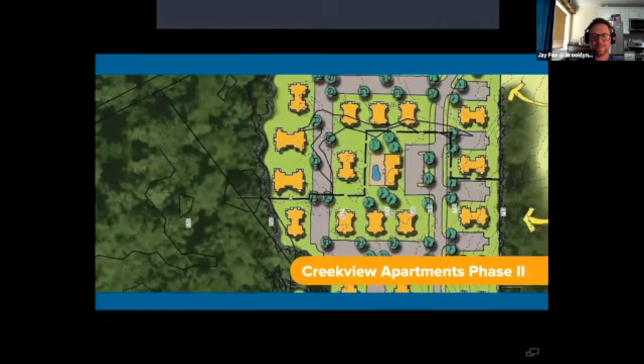This is a 96-unit apartment community, family project with 1, 2, and 3 bedroom apartments. One of the benefits is to get off the use of fossil fuels, taking the first step toward building electrification that will really be able to work off the technologies of the future. Sendero Verde is a 3-building, 800,000 square foot, 100% affordable housing project in East Harlem. It has a really robust community facility. Linden 2 is out in Lindenwood, Brooklyn. It is an 8-story, 160-unit multifamily building, 100% affordable housing.

The challenges are very typical of any other type of project, but if you have the right team, you're able to overcome them. In designing a green building, sometimes the upfront cost is more. Contractors present items that are cost effective, but we had to make a decision to push back and stay true to our design. One of the challenges going into this is we're going to have to find contractors who are willing to be trained to build this kind of construction. I think it's great to see us finally embracing new technology for the better.

I hope that builders, developers actually start thinking diversity and inclusion, and that's all part of our responsibility in this industry. What I really hope is that we can move high performance building from something that's only achievable for a very small percentage of people and really make it part of the mainstream.

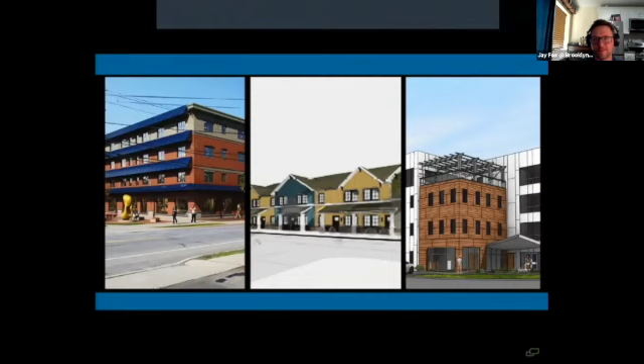We have a statewide climate initiative that's trying to really solve a big problem that the world is facing. The Buildings of Excellence Award is great because it's incentivizing other architects to really push the envelope forward. I'm really excited to see what happens in the next 30 years.

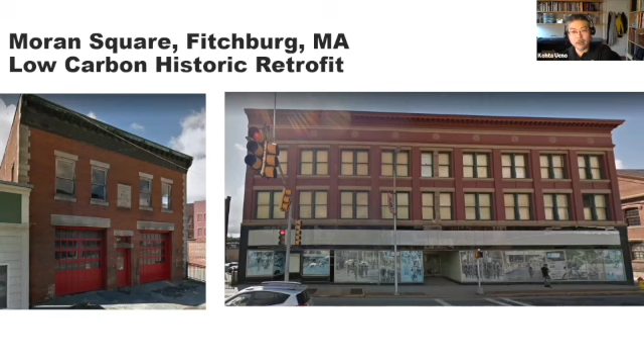So it's a retrofit of a set of existing buildings. This just shows an overview. This is Moran Square in Fitchburg, Massachusetts, one of those older mill towns. It's an existing firehouse, mass masonry, as well as a commercial building just around the corner. You can see there's an empty lot between the two of them.

The firehouse is down here. The plan is to go ahead and renovate these two existing buildings, as well as build a new construction building infilling between the two of them. There are a bunch of restrictions here.

And project goals that are in conflict and push-pull against each other. Number one, passive house performance. Number two, it's completely reliant on historic tax credits to make it work. So there's National Park Service weighing in, as well as a goal to use low carbon materials in this entire project.

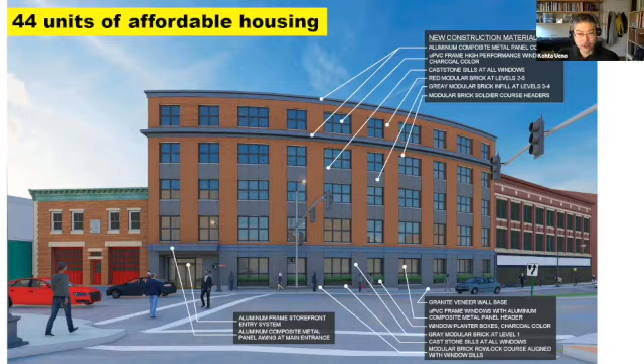So the part of the presentation I dealt with was specifically the enclosure, the retrofit enclosure design for this project. Whenever I give a talk about mass masonry walls and insulation, I want to make sure we're all talking about the same thing.

A mass wall is the classic foot-thick New England mill building solid masonry wall. The concept of how it works is that when it rains, moisture is safely absorbed in the material, stored there, and released later when things are drier. We can store that moisture in there without being damaged. So there's no actual drainage plane or waterproof layer. It's reliant on the mass of the masonry in order to work.

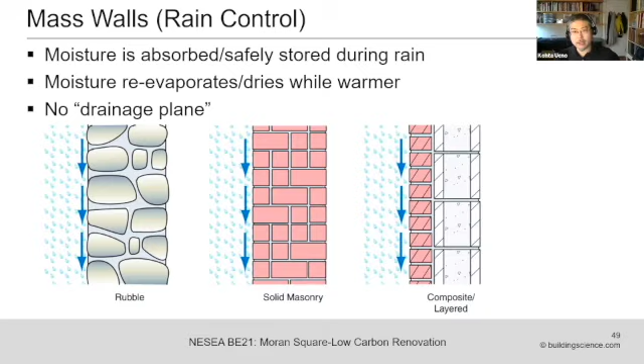If you have an existing mass masonry building, the safest way to retrofit it is always on the exterior. It's both the safest in terms of durability and lowering condensation risk. It also typically has the best energy performance out of all the options. I'm just showing an example of an EIFS overclad as well as a metal panel overclad on an existing building.

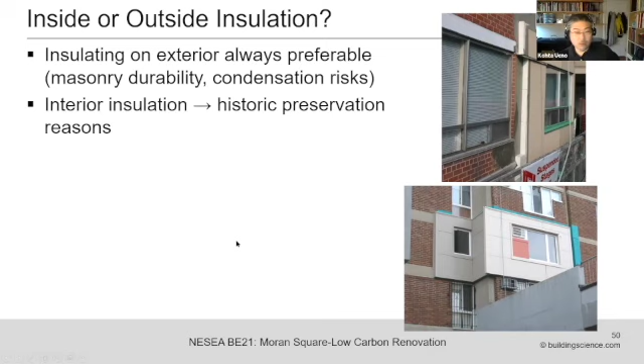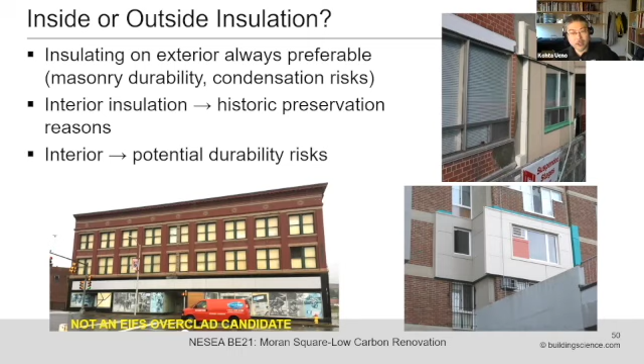The thing is, there are many historic buildings where that's just not really on the table. There's no way that I would do an EIFS overclad of a beautiful old building like this. Historic preservation does have its role in that. So the problem is, if we insulate on the interior, that runs us into potential durability risks.

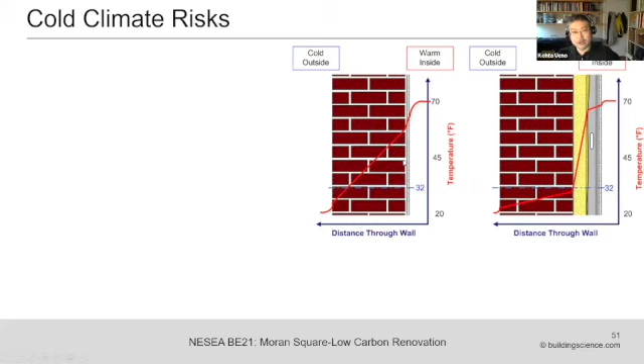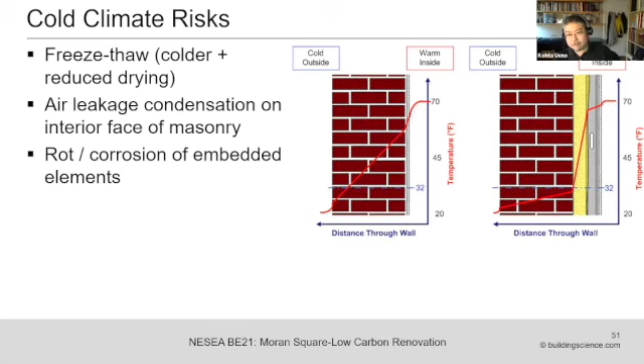So let's go back into the potential risks. One is the potential risk of freeze thaw, damage to the brick due to moisture and freezing. Another potential risk is air leakage condensation on the interior face of the masonry, which is going to be colder than it was before. In addition, there is rot and corrosion risk of embedded elements like joists that are pocketed into that masonry wall, partially outside of the insulation.

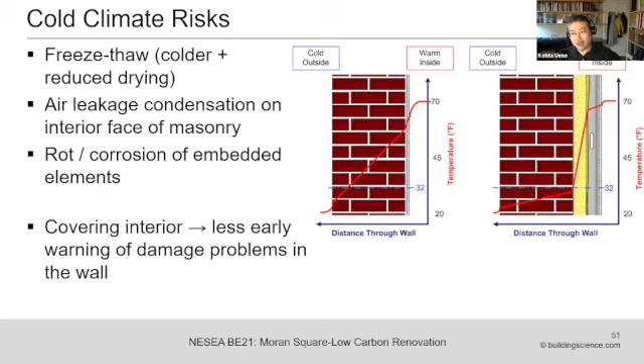And just as a final point, anytime you're putting anything on the interior of a masonry wall, insulation or not, you're covering it up, which makes it harder to see when there are problems. For instance, if you have plaster or bare masonry, it's pretty obvious when moisture is getting through and you're bubbling off your plaster. Once you cover it up, a lot of those tells are going to be a lot less obvious.

So getting into these in a little bit more detail. The first of those risks was freeze thaw. That freeze thaw damage occurs to brick when you get it really wet - we're talking drown it in a bucket kind of wet - and then you cycle it above and below the freezing point, or actually more specifically, all the way down to maybe 23 degrees.

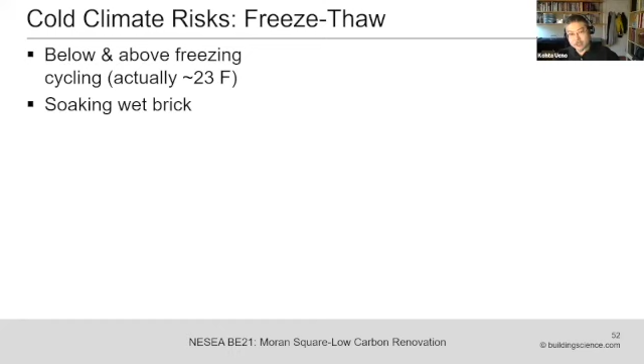That type of cycling can result in damage like this, where the surface flakes off, kind of like phyllo dough. Basically, the whole surface comes off in a layer. You can see it's pretty obvious what was going on here. This is a Boston building. The downspout got disconnected for a while, and was dumping a lot of the roof's water right on this brick wall. Presto, you have this kind of damage on the brick, that phyllo dough flakiness.

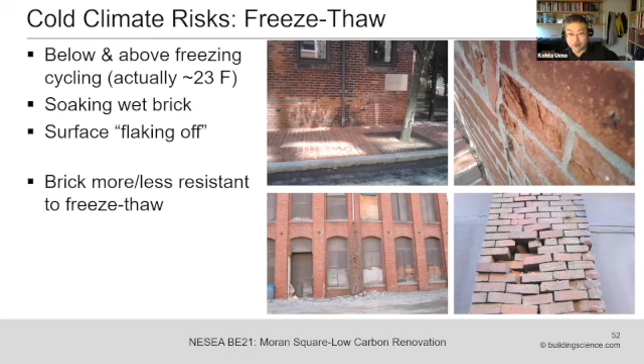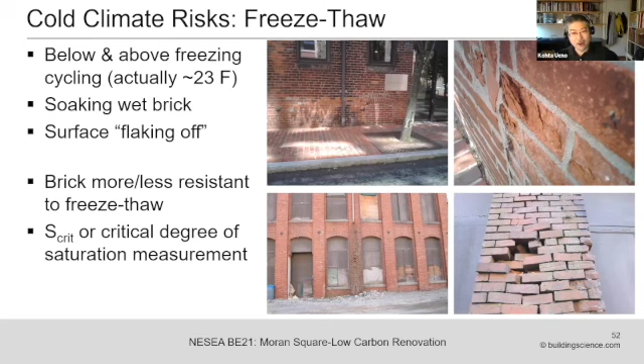Now, you can measure this specifically with something called the critical degree of saturation, or S-crit, but that's another half-hour talk in itself. Another thing to realize about freeze-thaw is that climate matters.

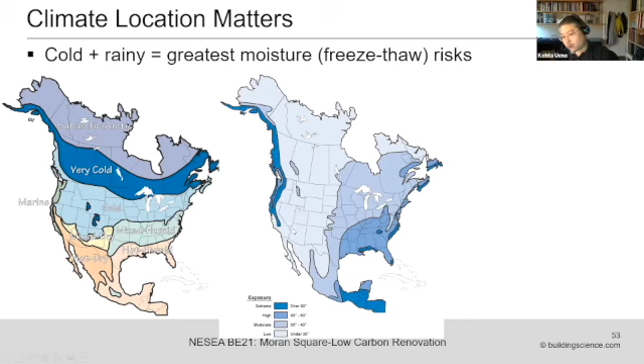It's going to be the combination of where it gets cold and freezes and where it gets really wet. So for instance, we take a climate map, take the cold and very cold climates, combine that with where it actually rains. This light blue is where we're under 20 inches a year.

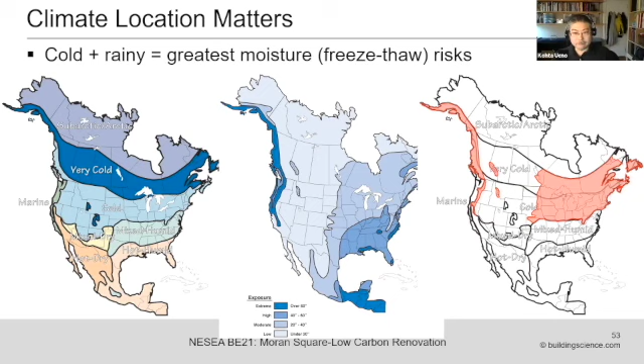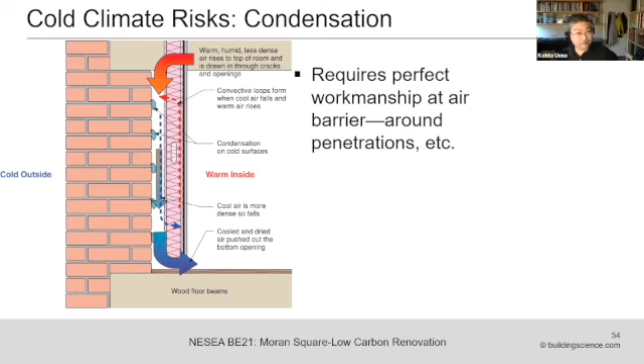To make this kind of thing actually work, you need to be perfect, and that's not really happening. Also, that air gap creates more of a chimney effect, making the problem worse.

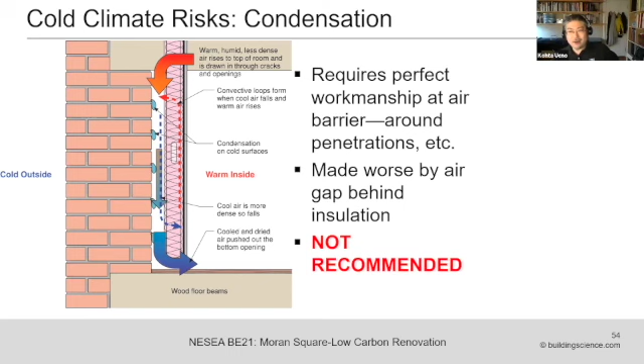And if anybody ever says, oh, that's crazy building science, it doesn't actually happen, those are just theoretical problems—this is a building I investigated that was suffering that exact problem. A concrete warehouse in Philly. I could wipe the water off the back of that wall with my hand.

It was so bad coming down that it leaked through the floor, and the folks in the unit below were complaining, 'Hey, my window's leaking, I'm getting all this water through my window head.' That's how bad it was.

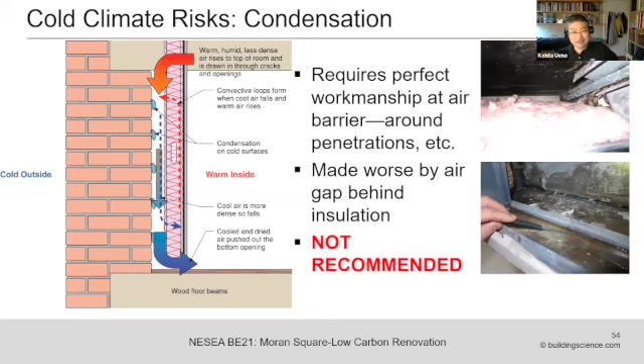Yet another question I get whenever we talk about insulating mass masonry walls is, do we need to insulate them? These are mass walls. The code says we don't need to insulate as much. Shouldn't it be fine on its own?

So what I did was just a really basic WUFI simulation, a square meter of wall, measuring the heat flux by month through it, starting off with uninsulated, foot-thick masonry, R5. Of course, WUFI accounts for solar gain, rain, thermal mass, all of those real-world issues you'd expect.

Obviously you can see heat flux is greater in the colder months going out, and heat flux is inward during the summer, exactly what you'd expect. This is a Vermont climate.

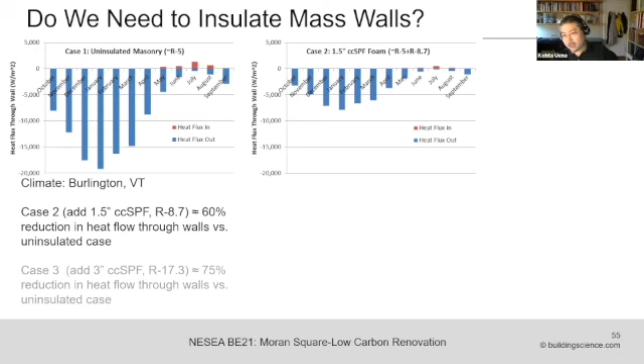Then I did the same wall, simulated it with 1.5 inches of closed-cell spray foam on the inside of the wall. Surprise, surprise, about a 60% reduction in heat flow. That's what happens when you change the R-value of the wall by that much—it's just a completely basic number.

Bumping that up to 3 inches of spray foam shows diminishing returns—you're cutting half again as much of that heat loss through the wall.

So another of my colleagues did a set of simulations looking at mass versus no mass, high mass versus low mass insulated wall. The net effect is about R1 in a cold climate.

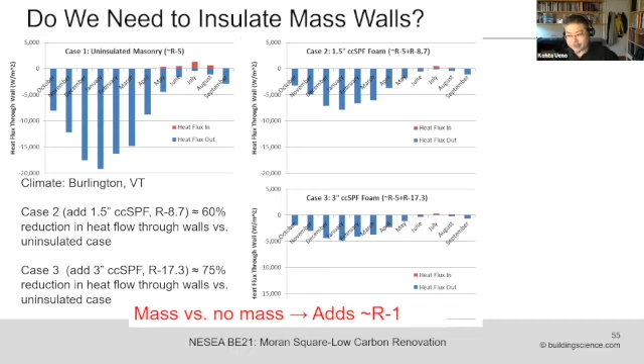I'd say, wait, doesn't thermal mass make sense? And that is absolutely true in climates where you have a diurnal variation, where the outdoor temperature is varying up and down, above and below the comfort condition—hot during the day, cold at night.

The desert Southwest is the classic example. With that thermal mass, it takes that uncomfortable-at-both-ends situation and basically damps it out to something closer to comfort conditions. In contrast, in New England, what do we got?

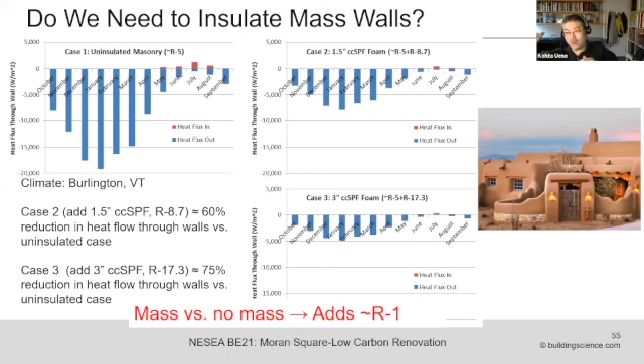In the middle of the winter, the temperature varies between cold and frickin' cold. So damping out that signal is not going to help you very much.

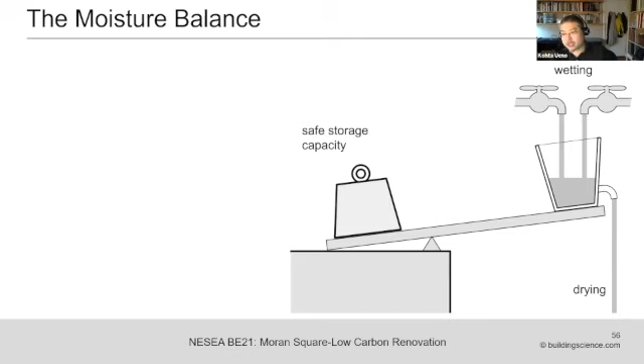John Straube has been very instrumental in my building science education, and he often uses this example of the moisture balance, talking about potential risks and durability with assemblies. You can think of an assembly having wetting going on from the outside, moisture sources, and simultaneously it's drying out.

As long as drying is happening at the same rate as the wetting, you are not overwhelming this bucket, making it heavier than the safe storage capacity, and you're not going to knock over this teeter-totter. If you have too much wetting, exceeding drying, you might start to have durability concerns.

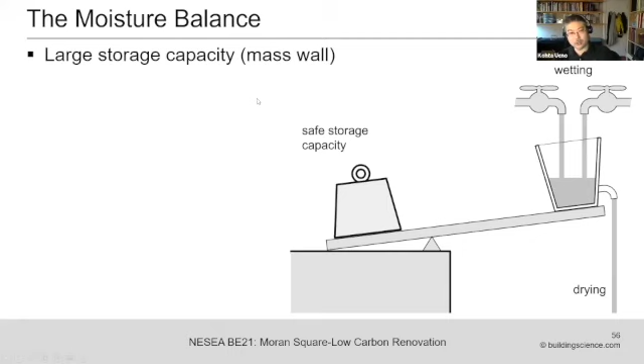So when we insulate on the inside of this wall, we are decreasing drying. That evaporative energy flowing through the wall is being cut off because we're paying for it, and we want to reduce how much goes out. However, as a result, we have less drying ability of this assembly. So what we want to do whenever we do one of those retrofits is look at the wall and reduce or control wetting to compensate for this reduced drying.

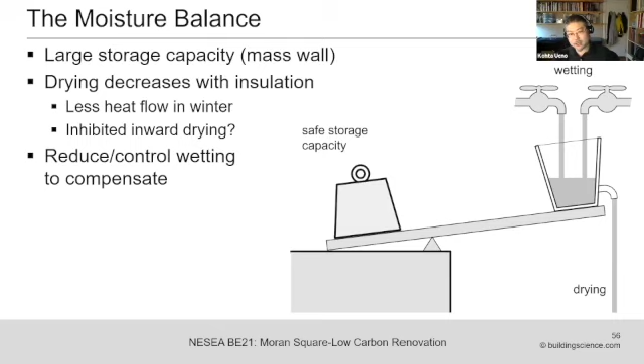Okay, a whole lot of background so far. So let me jump into a little bit more concrete stuff of the masonry wall assemblies.

That being said, a little bit more background. Folks have been doing this in Montreal, a very cold climate, back to the 90s. Folks have gone back to look at this, and as far as anybody can tell, this is not a massive durability problem by any means. These buildings look fine. That being said, we can use other solutions.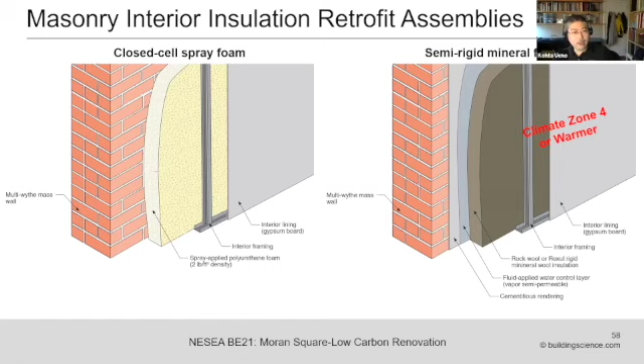You could also do the same kind of assembly with a stud frame wall with cellulose, for instance, but once again you are worried about the humidity control issues—the climate zone, and also interior humidity in winter will be critical to making this work. It might work fine at 30% humidity in winter. At 50% humidity, you might be running into problems.

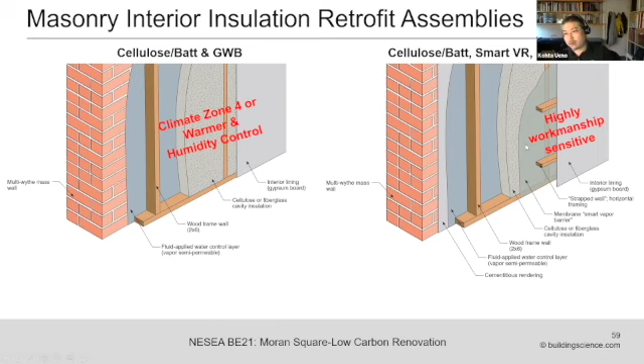This would be, building on that previous wall, putting on an interior smart vapor retarder, air and vapor control, building service cavities to run your electrical so you're not punching your air control layer full of holes. That's a pretty darn good wall, but there's a lot of moving parts in there. But then again, I'm talking to a passive house crowd, so that's probably dirt simple.

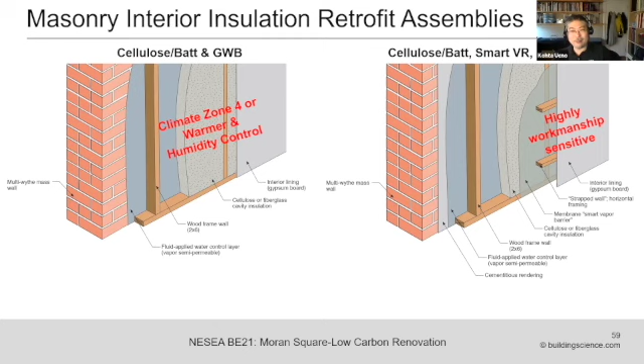So what was the assembly that we came up with for the Moran Square project? Like I said, we have a bunch of push-pull requirements that we were fighting with. First of all, National Park Service Historic told us we could only build in 4 inches from the original line of the plaster to avoid a thick build. But on top of that, for a passive house, we wanted airtightness and a high R-value—kind of conflicting requirements.

So the way we went about it was a fluid-applied air water barrier on the inside of the masonry, pinned a couple of inches of mineral fiber to the inside of that, and then a stud frame wall. Now, the ideal location in terms of an air barrier would be to put the air vapor control layer there in the middle of the wall. Unfortunately, we do need to insulate the stud frame cavity because we're trying to maximize how much R-value we can get in a limited amount of space. So this is a bit of a push-pull that's still going on in the project.

This is less than ideal hydrothermally, but the problem is putting our air barrier on the interior is going to fill it with Swiss cheese holes of electrical boxes, T-walls, etc. Still being resolved. In addition, there are other parts of the building where Historic restricted us to barely a 2-inch build-in, so we basically had to put our air vapor control directly behind the interior tongue and groove wainscoting finish.

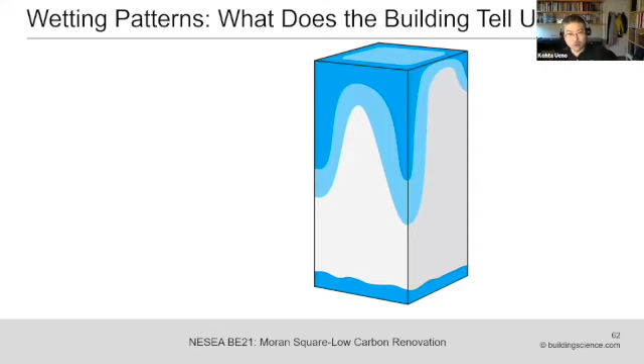So moving on from that, just the basic walls—what were some of the tricky enclosure items that we were evaluating and looking at? So one key thing whenever we look at a masonry building for retrofits is: what are the existing patterns of damage and/or moisture accumulation?

So what can we learn from that to prevent those mechanisms from happening? The classic spots we look at are what Joe calls where the building touches the ground and touches the sky. So the top of the building, the parapet, the top corners will get nailed by driving rain, the wind whipping it around the building, as well as those outside corners, as well as down at the base of the building, where you have splashback.

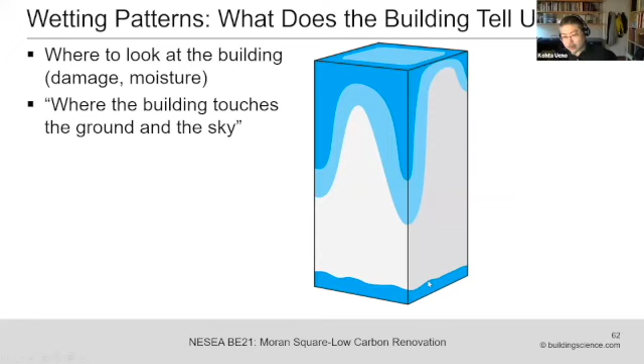On top of that, you also have windows. Windows do not absorb any of the water that hits them, so it runs down and then drools onto the wall below. That's why you see these mustaching patterns down below most windows a lot of the time.

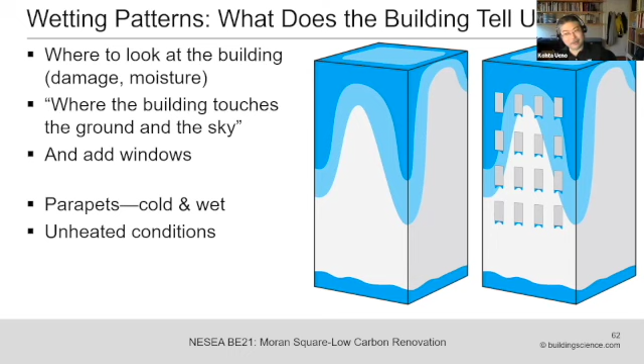It's often very useful to take a look at the parapet of the building. Number one, it's extremely exposed, and also it's going to be cold—it's not getting heat from the inside. Remember, a parapet is a fin that has outside on both sides, so that's going to be a very good tell on how this brick behaves without interior heat. On top of that, the best test of all is if this building has been mothballed and unheated for a bunch of years—they've been doing the perfect test for you of figuring out how the building will behave if we don't have interior heat flowing through the wall. It's like, that's what we got.

What's going on here is called capillary rise. There's moisture in the ground or running off the parking lot that is wicked up through the masonry and the brick, carrying dissolved salt in that water as it rises. It later evaporates out through the face of the brick, and when it evaporates, it leaves the salt behind, causing this type of erosion of the mortar joints and the brick surface.

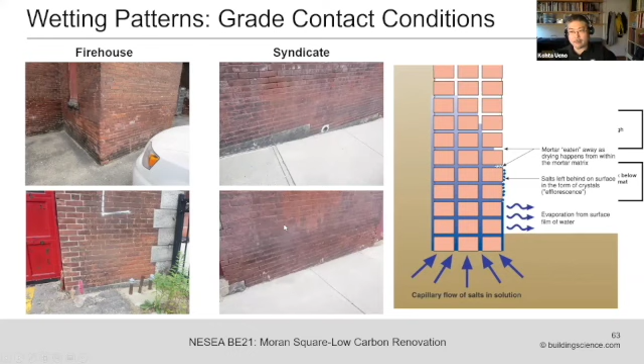So one thing to realize is, if you want to retrofit a detail where you see damage like this, I would pull out the surface layer of brick, put on some type of waterproofing, and then go back with a granite curb. Granite does not absorb water, so it doesn't suffer capillary damage, and it's highly resistant to freeze-thaw as well.

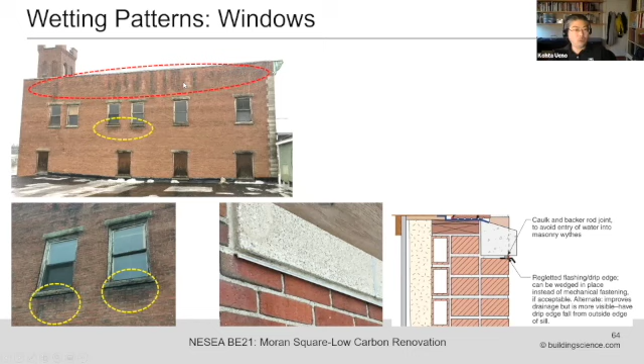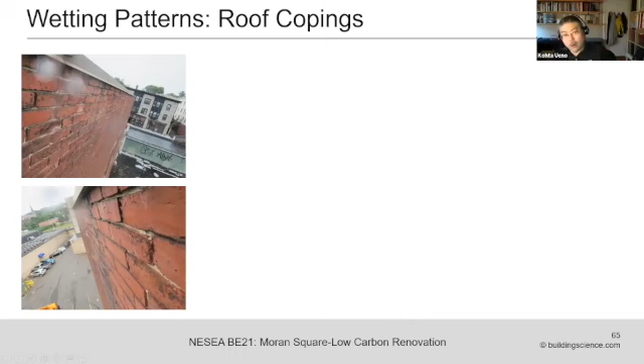Another issue we can see here is the roof. You see all this black staining coming off of the parapet—what's going on there? I went up to the roof, and basically nothing actually matches up with all of these stains. What I can basically guess is that there were previously coping stones leaking, causing these stains before this roof was retrofitted. Overall, the parapet looked pretty decent on the scale of things.

Anytime you have a parapet situation, the more you can push out a drip edge, even just one 2x4's worth, the more you're protecting the wall below. Also, dumb stuff happens—like over here at the back of the building, what probably happened is that this saddle detail was flashed wrong, dumping a whole lot of water onto the brick wall below.

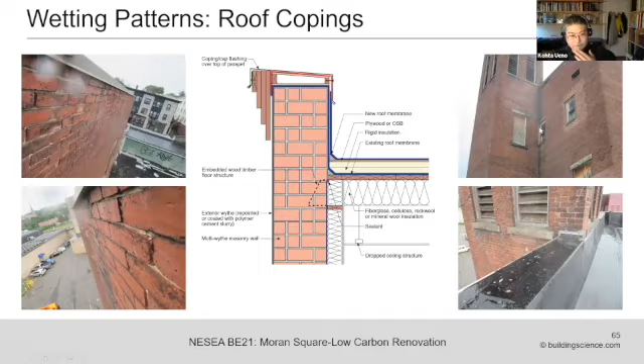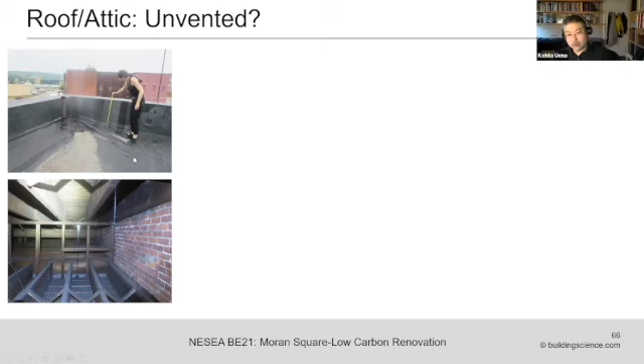Moving on to another topic, in terms of the enclosure retrofit in general, we had the choice in these buildings of going with a vented or an unvented roof. There's actually a small walkable or crawlable attic below this low slope roof membrane inside the parapet. One option is to build up foam on the outside, usual commercial roof, maybe supplement it with additional insulation in the roof rafters below. We have to insulate the wall though.

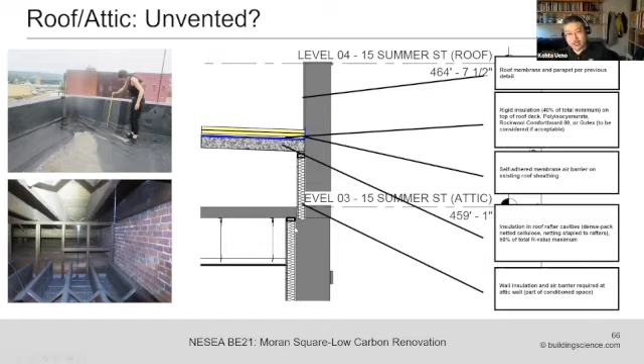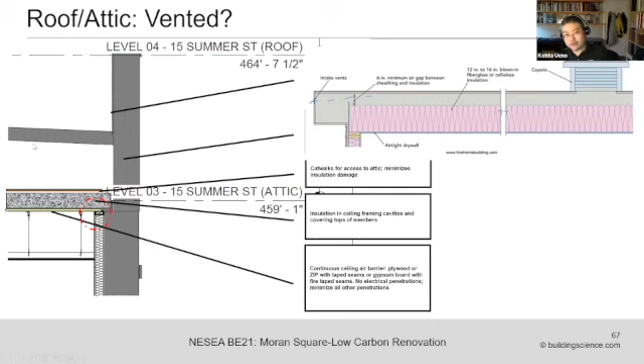That being said, that can work, but with the mechanical systems we were using, there wasn't really any need to fill up this attic with mechanicals. So instead, we decided to go with a vented attic where our air barrier is the fire ceiling, carefully sealed including to the masonry wall, with a thick layer of cellulose insulation, a low carbon sequestering material that's very cheap. You can go very thick with a catwalk above for inspection, and vent it to an outdoor space. One key tricky thing is making sure you actually have outside airflow through this type of low slope attic situation, which is often difficult given the lack of head height. So one way to go about it is you add a cupola. We added a cupola on the front of the building, louvers at the back. It's a compromise, but pretty reasonable on the scale of things.

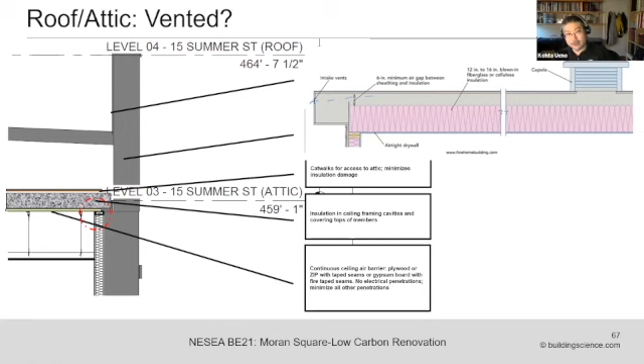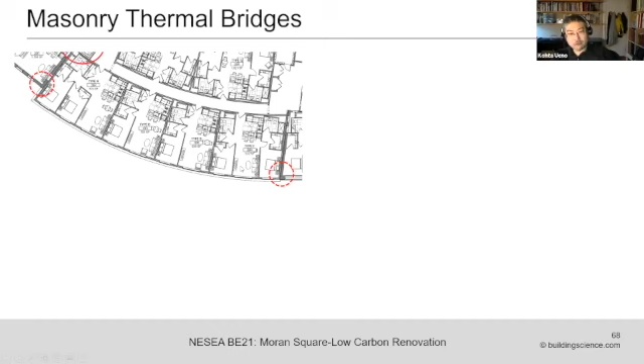Another thing you deal with when insulating a mass masonry building is potential thermal bridging through situations like T-walls. This shows the existing firehouse and commercial building, and the curved front is the new construction building being infilled between. One of the problems are those T-wall situations that are created. If you do thermal analysis, you can see that the solid masonry party wall is basically wicking heat to the outside. Yep, it's a thermal bridge when you're only insulating on that exterior wall.

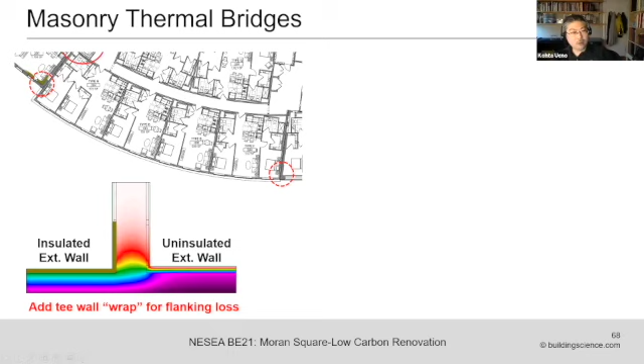That being said, a pretty reasonable approach to reduce that thermal bridge is you just continue your exterior wall assembly around the corner and basically run it around to try to insulate a little bit more of that T, and it does a pretty decent job of reducing how much heat flux is going through that condition.

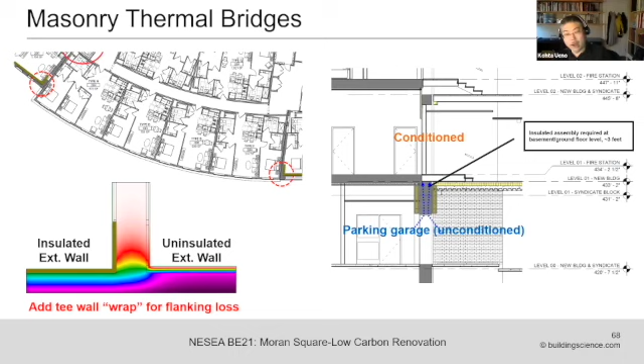In addition, you can turn your head 90 degrees and think of this another way. This is a situation where the existing building, one of the masonry buildings, is hitting the new construction building. You can see it's conditioned space on the first floor, and the ground floor is an unconditioned parking garage. You guys can probably see that we have a big masonry wall sticking down over here. That's going to be a thermal bridge pulling in cold from outside. So all we can basically do is try to insulate that wing and try to reduce or control the degree of that thermal bridge.

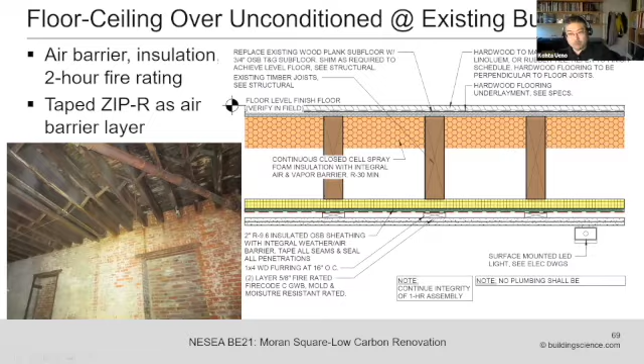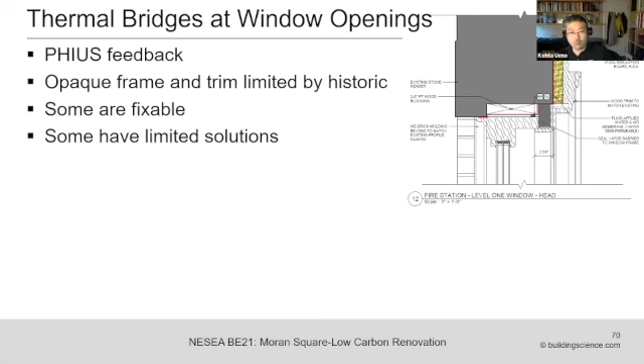Another issue we dealt with was thermal bridging at the windows. We sent the preliminary plans into PHIUS. They provided some feedback saying, hey, you got some thermal bridging, possible condensation risks. Yep, that's fair enough. The masonry is left exposed there. The limiting factor is that all of the window dimensions are strictly constrained by the historic requirements of this project, so there's not much wiggle room to work with. In some cases, we could add a block of EPS foam to basically provide insulation, air control, condensation control, but in other cases where we only had so much space to work with, that's about all we could do.

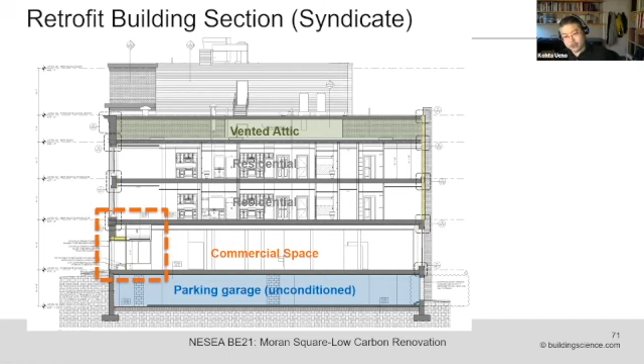Another tricky component was the whole air control, air barrier part of things. This shows the layer cake of what we're dealing with: the vented attic up top, exterior, 2 floors of residential in the retrofitted building, unconditioned parking garage below, and a heated commercial space. One problem was the storefront: the historic single glazed aluminum storefront had to be retained for historic purposes, so we built a new storefront inboard of that. But one of the problems is that even though the commercial space is heated, it's excluded from the passive house boundary, and unfortunately it is included as this boundary is part of the blower door test. We're not allowed to do a guarded test.

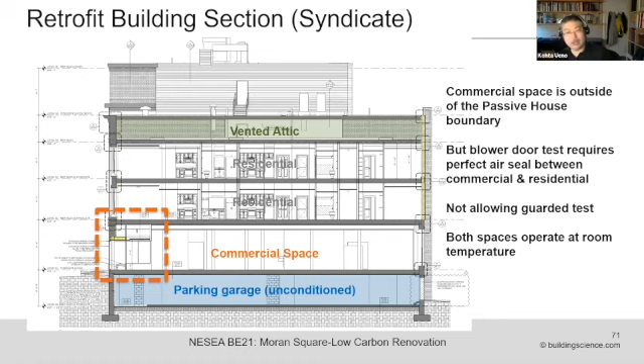Something I don't agree with, even though both of these spaces are running at the same temperature. That's going to be something that'll need to be resolved during construction.

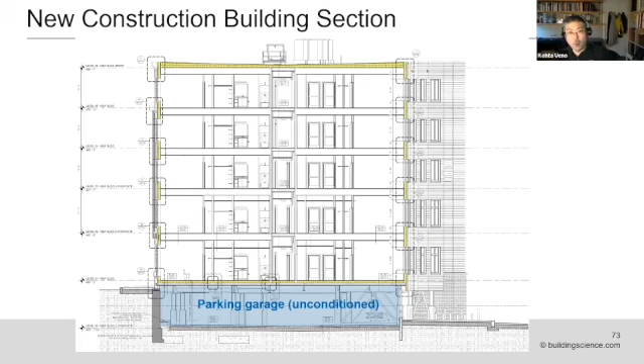Just to wrap this up, in case folks were curious about the new construction assemblies for that infill building, most of it is pretty straightforward. The roof is completely generic. The wall is kind of interesting, as well as the deck over the parking garage. So that shows their wall assembly: we have a 2x6 stud frame wall, cellulose insulation. Like I said, we're trying to go with carbon storing, low carbon materials in this project. Air and water control layer, 4 inches of mineral fiber on the outside, and our furring and cladding system.

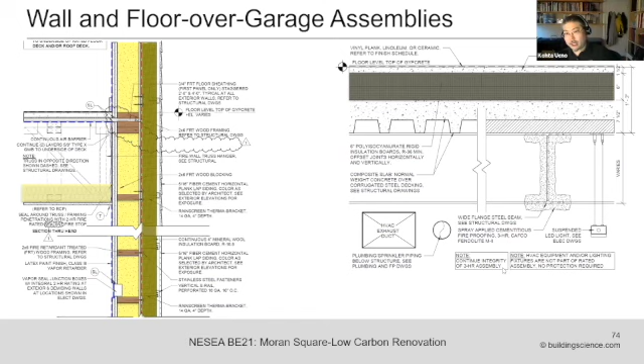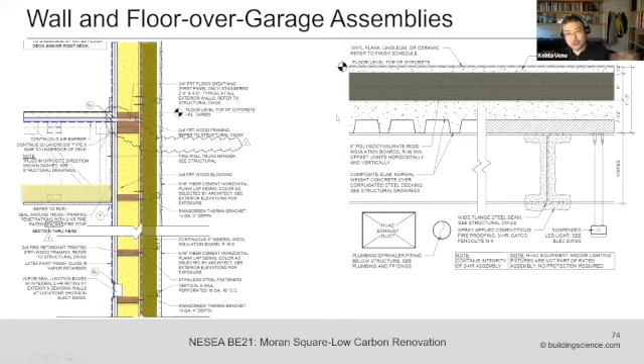On the deck over the parking structure, it's a corrugated pan deck. One way to do it is to insulate on the underside, but there's all this structure to deal with—you have a massive amount of thermal bridging that you need to wrap. It turned out to be logistically easier to build a raft of 6 inches of polyiso on top of the slab, with thermal breaks where we have structural interior walls, and a gypcrete layer on top of that. It's a nice continuous sheet of insulation running across the entire assembly.

Okay, and that was my part of the talk. So, Prue.

Thank you. I told you guys, right? Do you agree? It was a veritable fire hose coming from the firehouse. Thank you so much, Kohta.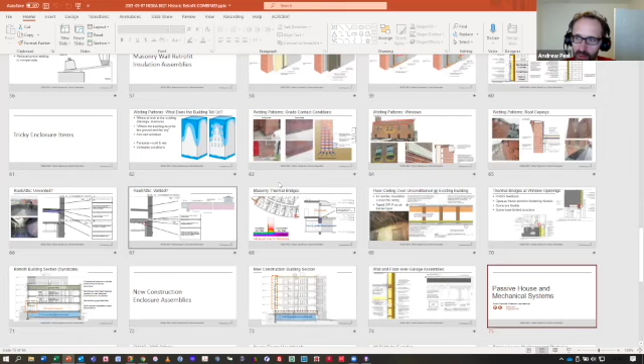A question around the spray applied cellulose, because that would be wet applied. And obviously most of the presentations have been around moisture. Is there concern of that cellulose actually being able to dry out properly?

Yep, actually that's a fantastic question. I'm not positive whether the team is leaning towards damp spray or dense pack—each of them have their pluses and minuses. I think Michael was on the call talking about patching a bajillion holes through your air vapor retarder when you do a dense pack job. That's a definite problem. If we were going with a damp spray, the one thing to remember is it'll depend on where the air vapor control layer ends up being. If I place it at around the 1/3, 2/3 points, we can have unfettered drying to the interior through latex paint—that's 10 perms plus. Even if we were putting the air vapor control on the inside, that's a variable perm vapor retarder, and those things do work. If it's cranked up to 100% relative humidity, that'll open up fully and let a lot of that moisture through. Less moisture is good. Quality control on a damp spray is always critical—I've seen bad damp spray jobs where you can pull it out and wring out the moisture. It should be just kind of damp to the touch. But other than that, designing a wall that can dry is critical if you're considering damp spray for sure.

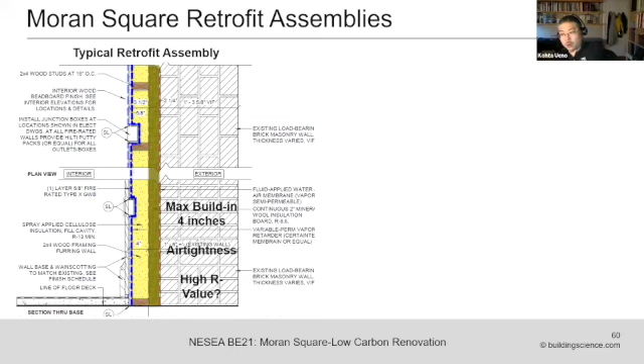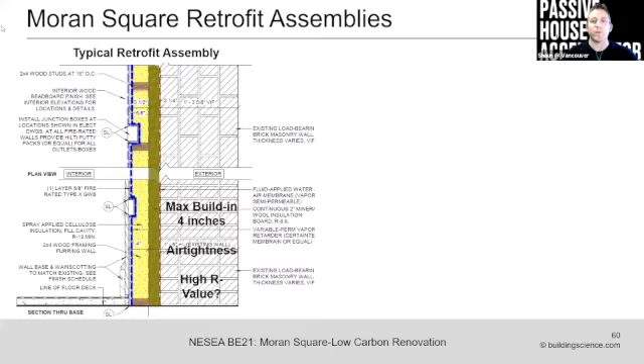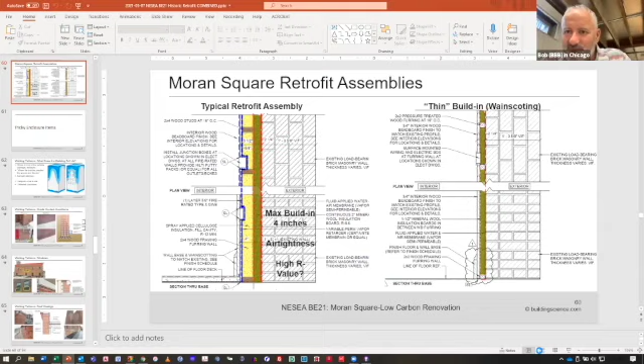I've seen your work before, and it's very good. I get involved in a lot of wet masonry buildings here in Chicago, and aside from the fact that we see common issues all the time, I focus on the roof terminations and venting through my roof terminations. Do you have any thoughts about that?

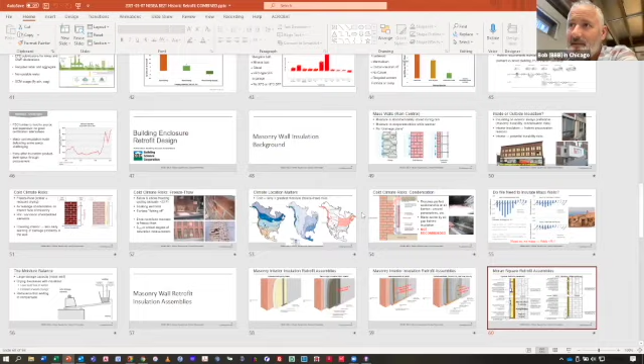Sorry, can you clarify that a bit? Venting through your roof terminations—are you talking about a regular roof penetration, like a pipe stack, or something else? Well, the inside perimeter of the parapet walls—because I don't have the benefit of endless funds to deal with. So in trying to dry out these buildings, we create about a 3/8 inch rigid airspace from which we terminate our roof membranes, and it successfully pulls water out of buildings pretty aggressively. I wasn't sure if you'd ever come across that—it's like an interior rain screen. Okay, so you're basically talking about a parapet condition. Yeah, you'd have a mesh and basically let the water evaporate out. Yep, it allows an avenue of drying for sure.

That's no argument with that. I have seen also some other folks who do a rain screen mesh on the inside of the masonry and then spray foam on the inside of it, just as another example.

That's a great idea. I'm of two minds of that. One is it'll definitely allow redistribution of moisture. It gets wet in one spot, it can evaporate and move on to another spot, kind of even out. That's entirely fair. But if you have a really bad water leak, a bulk leak, the problem is you've created this perfect drainage channel that can go from point A in your building to point J, and you have no idea how it got from point A to point B, or for that matter, running down and rotting one of your joists, when you can't see it. So the pluses and minuses of that.

Yeah, well, we seem to be doing a lot of it. So that can take up a lot of airtime as other people want to ask questions. I'll come back with another question and give someone else a chance here. So I appreciate your feedback. You bet. Thanks, Bob. And yeah, stick around because I know you'd have lots more to dive into this.

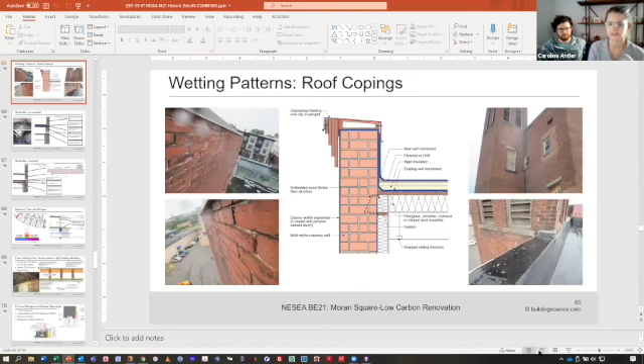Yeah, hi. I was just wondering what the risks were with the interior solution with the fluid applied air barrier on a historic building. We have a 100+ year historic building with brick that's in pretty poor condition. It's already leaking. The current solution has condensation on the interior walls. It's not working. Just wondering how long that might last if we were to do an interior solution and how it might impact the brick's integrity.

Sure. So we're talking about the spray or brush on fluid applied membrane. That will definitely reduce drying to the inside of the masonry. That being said, we usually specify something that's vapor permeable that allows at least some drying to some degree. So that's one avenue that's not completely shut off. The key thing, sorry if I'm a broken record on this front, but the key thing is figuring out where's the water coming from on the outside. Are there any patterns? Are there any details that are catching water? Is there a ledge? Is it windows? Is it a bad flashing detail? That's the key thing that I always look at first.

In terms of how much durability risk are you adding, it's always going to be this push-pull between how dry can you keep it, and how cold is it going to get overall. So that'll also depend on your climate zone, of course.

Oh, great. Thank you. Yeah. And it's kind of a non-answer. And the last thing is, the ultimate solution is to test the brick and figure out just how freeze thaw resistant it is. Looking at the brick is one thing that'll tell you something, and actually testing it gives you even better information, but that becomes a very expensive proposition at that point. Usually I've only had commercial institutional clients, universities, take us up on that kind of approach.

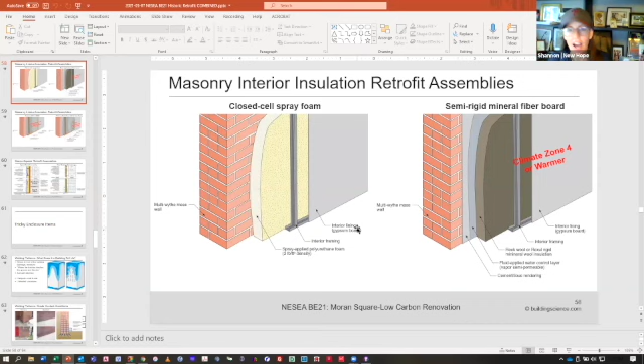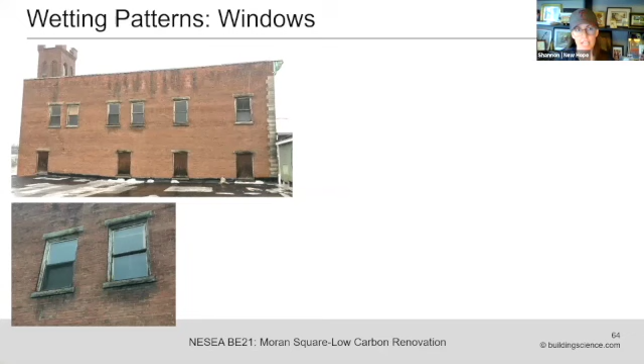No worries. My question was about the windowsills and the water coming underneath because they didn't have a drip edge built in. I like the reglet solution, I've seen that before. I wondered, is it possible, instead of putting a reglet into the envelope, to curve the edge of the masonry outside of the envelope to create that drip edge?

Yes, absolutely. For instance, if this were a more projecting stone sill, cutting a drip edge curve into the underside works beautifully. The problem is usually that we don't have enough projection to actually make use of it. The thing to remember is if we want a drip edge to do anything, we probably want, as a bare minimum, maybe a half inch to three-quarter inch projection of the edge from the wall below. Otherwise, it's just going to keep rolling right to the backup wall.

The other thing is a lot of the time I get pushback saying we don't want to cut into the existing fabric of the building—can we just add on something? That being said, if we're talking about a row-lock sill, where it's just brick sitting out like that, that unfortunately is my least favorite sill design. That's basically a whole bunch of skyward-facing cold joints in your sill taking the brunt of that water. If you have a row-lock sill, I recommend overcladding if you can get away with it, but that's often an uphill battle.

Oh, you bet. Excellent. Okay, moving along.

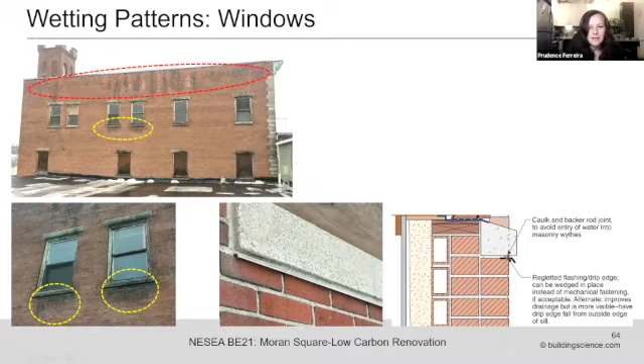Prudence, Kohta, I'm wondering what your opinion is on the hygrothermal benefits and detractors of using a silane or siloxane treatment on the exterior of brick. I gotta ask. Yep, excellent question, absolutely, that is a fantastic one.

For those who don't know, silanes and siloxanes are clear waterproof coatings. They bond to the face of the brick or masonry and provide some degree of water shedding. The wisdom I've gained from John Straub is he's seen a couple of case studies where they siloxane the outside of a masonry building. The problem is it does not do anything to bridge noticeable, macroscopic cracks. So even though it sheds water beautifully off the face of the brick and the majority of the mortar joints, it gets in at some points, and then you end up with efflorescent staining where water got in, tries to evaporate out, can't get out fully, and you end up with that staining. So that's one cautionary tale.

On the flip side, I've had other practitioners who work up in Toronto say they've had an excellent track record using a siloxane coating to prevent moisture ingress. So my takeaway is: it might work, but it might add risk. What would be wonderful, for any of these building durability questions, is if we had a hundred of these buildings out there as case studies that we could widely publicize, so we'd have a good population to assess—works most of the time, works 99% of the time, or works 50% of the time—so we'd have a better risk assessment. But as far as I know, that database does not exist.

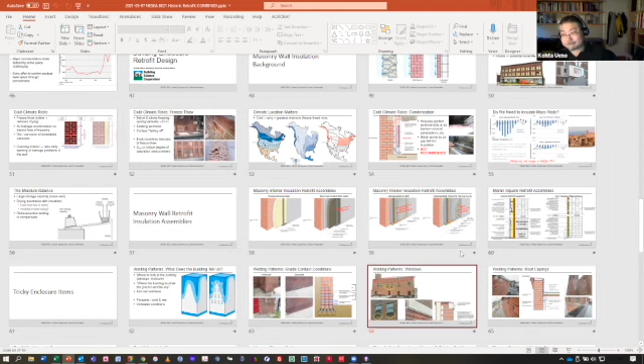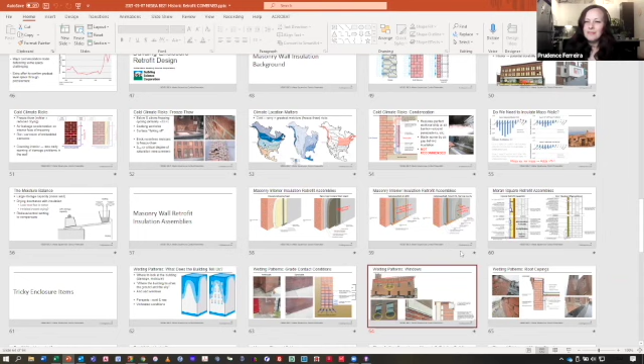I feel like somebody just mentioned to me recently that they're putting together a database of different brick retrofit approaches, and I'm kind of wondering if I heard it here. Do you guys remember? Does anyone remember? Must have been somewhere else. Anyway, if I can chase it down, I'll send it your way. Yeah, I agree, it would be great to have a database. Thank you. Excellent. Thanks, Prudence.

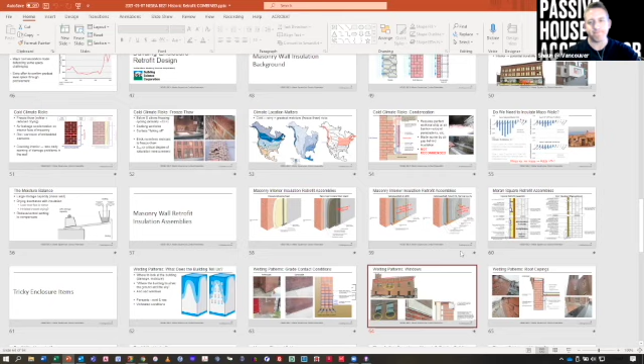Where did the hour go? I feel the same way. You're muted. Sorry, I'm having slow internet today.